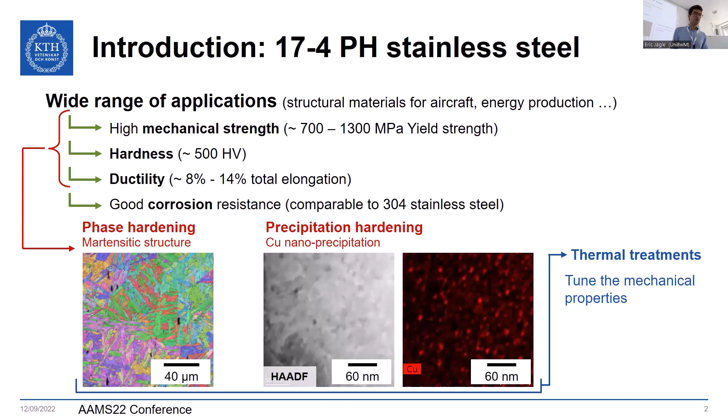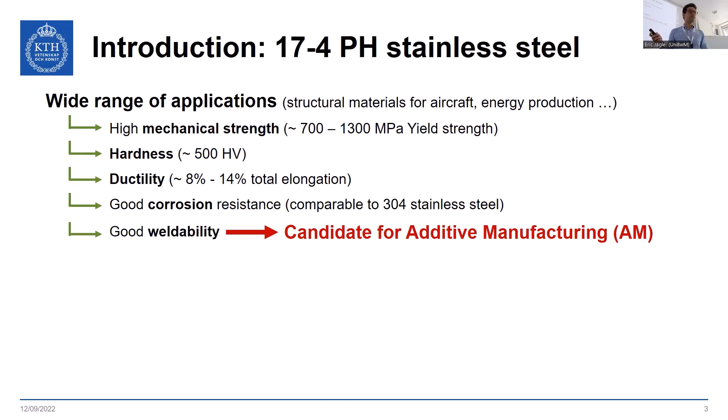These mechanical properties are mainly due to the microstructure, with phase hardening from the martensitic structure and precipitation hardening coming from copper nanoprecipitates. These are tunable mechanical properties, especially in conventional processes through precipitation hardening. Another interesting property of this material is good weldability, which makes it a good candidate for additive manufacturing.

If we take a look at the number of papers, here I plot the ratio between published papers and the overall papers in the engineering materials field. Overall the number of papers is increasing, and you see that for PH steel and additive manufacturing there's an increase of published papers. If we split this down into different techniques, there's a majority of work focusing on SLM, also work on EBM, and one coming after that here.

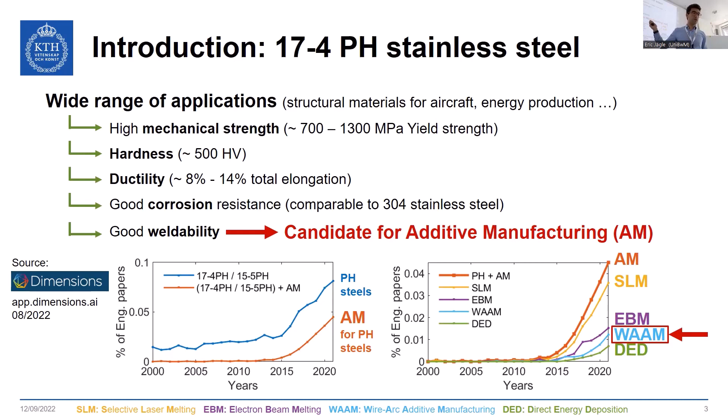We chose to focus this study on this topic. Why? Because this process has some interesting features.

It has allowed achieving relatively high deposition rates. Costs for materials and equipment are relatively low compared to other processes, and it also allows building medium to large scale parts. However, it's not really suitable for small or very high complexity parts, and the surface roughness is not always so good. Here you can see in this picture that just-built material has quite high surface roughness and would need machining for probably most industrial applications.

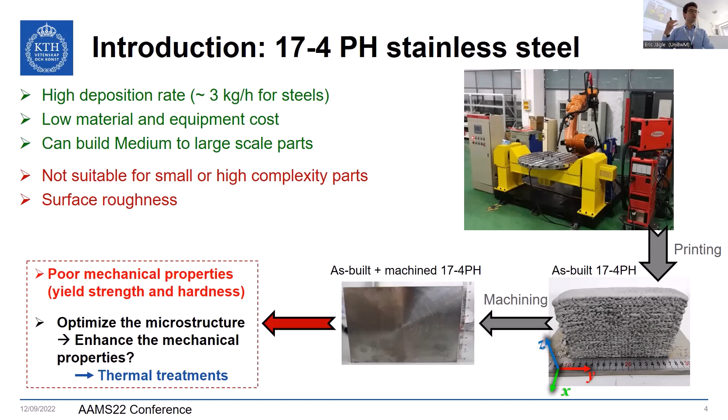However, as printed, the mechanical properties of this 17-4 PH are relatively poor in terms of yield strength and hardness. So the question we had is how to enhance those properties through thermal treatments, as we saw before, through the tuning of the microstructure.

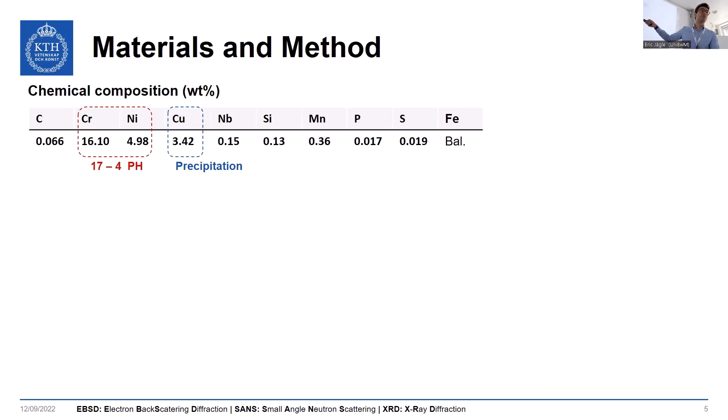So here I just put the materials. It's called 17-4 PH because it's 17 chromium, 4 nickel, more or less. Here you have high copper composition for precipitation of these nanophase copper precipitates.

Our methodology was to apply different thermal treatments, starting from the as-built, so aging at 480 for up to 4 hours, or a dual thermal treatment with first a solution treatment at high temperature with different temperatures and times, followed by quenching, and then subsequent aging at 480 for up to 4 hours.

All this will then be compared in terms of microstructure, characterized in terms of microstructure and mechanical properties through tensile tests. The microstructure is also compared to thermodynamic simulation that has been done, but I'm not going to present much of this in this presentation.

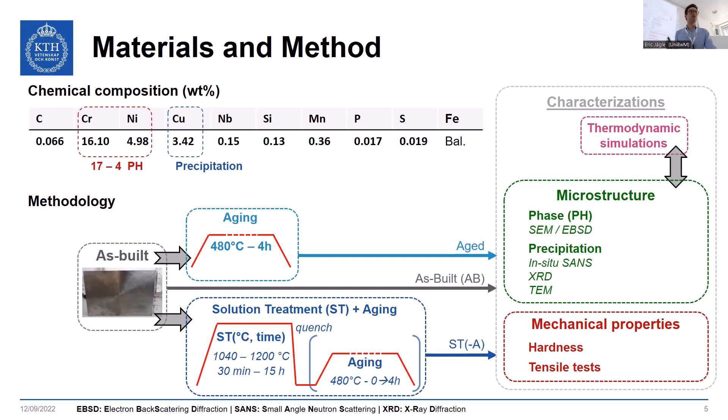So first of all, let's take a look at the as-built condition. You see as printed, you have a kind of columnar structure. The building direction is on the vertical direction. You have some cells inside.

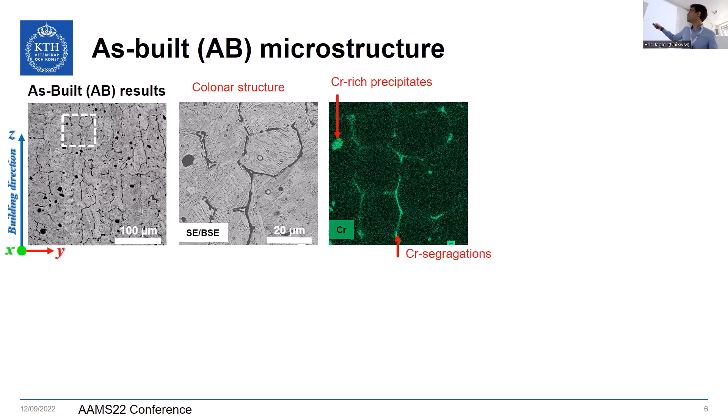You can see that at the boundaries of these cells, you have chromium segregation. You also have some precipitates. In terms of crystallographic microstructure, you have quite a high crystallographic texture.

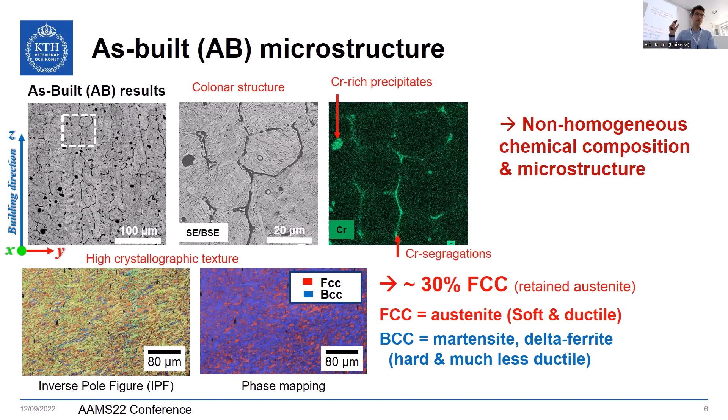What can be put forward is that we have quite a non-homogeneous chemical microstructure in terms of chemical composition and features, which probably leads to the poor mechanical properties that we'll see after.

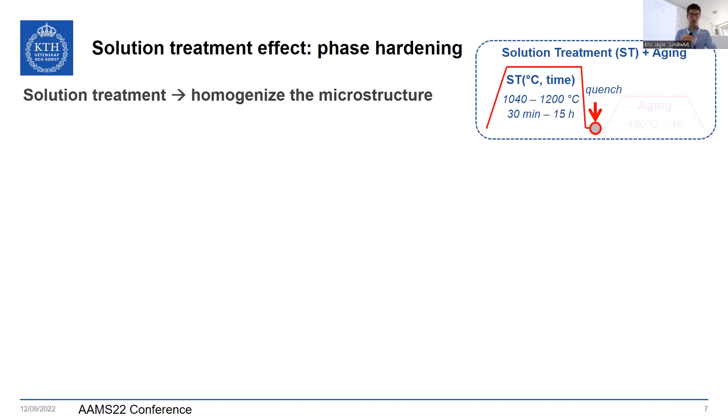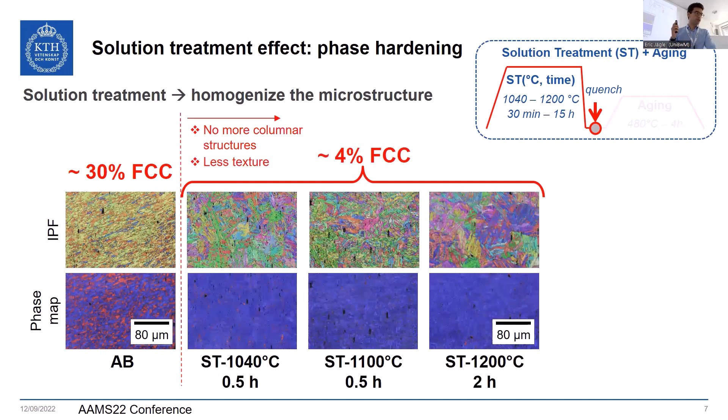So one strategy is to apply this solution treatment. Solution treatment will have the effect of homogenizing the microstructure. So we pass through austenization and then we quench. Here is the as-built microstructure for record, and then we have the microstructure after the solution treatment and quench.

So here you see that we reduce a lot the amount of FCC austenite phases. We also have much less texture, even though we keep some texture. Here is the phase mapping.

We apply different solution treatments at different temperatures up to 1200 degrees C for 2 hours. For all of these, we have more or less the same 4% FCC, while for 1200 degrees C at 15 hours, so a very long solution treatment, we have this FCC value a little bit reduced.

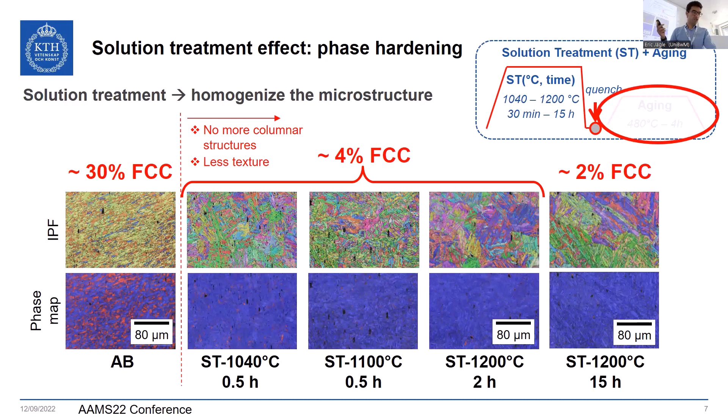So the question now is what happens during the subsequent aging. We will show here aging performed after 2 hours, and we'll see just after why I pick up this 2 hours aging.

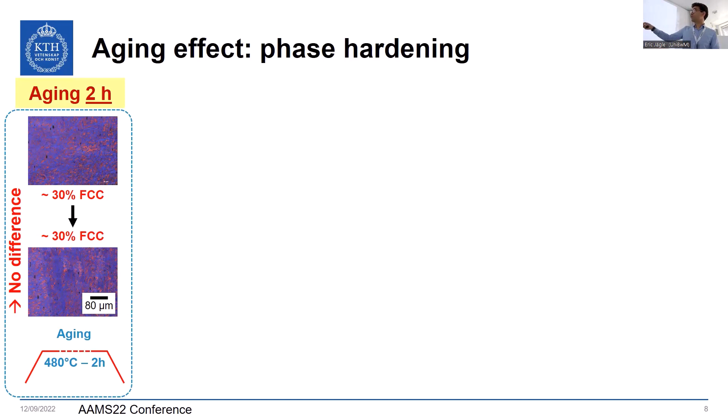From the as-built materials, there's mostly not much happening in terms of phase transformation. However, if we see the solution treated alloys, after aging at 1040 degrees C, half an hour, we have an increase of the FCC phase to 18% at the end of the term of the aging.

2 hour aging at 480, and it's decreasing with the solution treatment: 10% for those two, and for the last one we have 5% FCC after aging. So this austenite reversion, this metastable alpha BCC phase transforming to FCC, is reducing with the solution treatment, which means we have a more homogenized microstructure after higher solution treatment, which is expected, right?

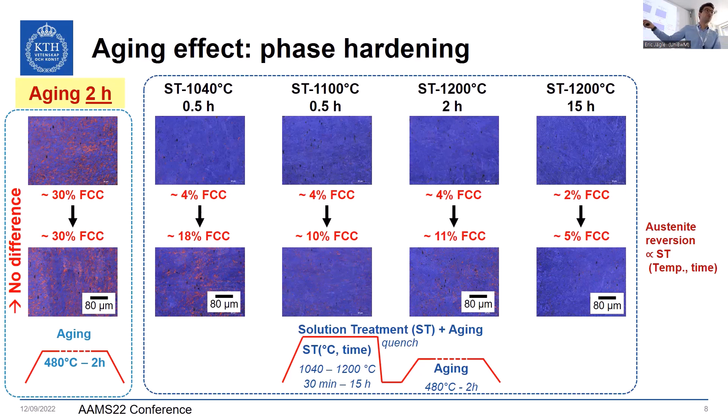But what is really interesting is that with this process, we can tune the amount of FCC. We have the soft phases, and then we can tune the ratio between soft and hard phases that we will have in our materials, and likely tune the mechanical properties, which is not possible in conventional process because we don't start from this very heterogeneous microstructure.

So in terms of hardness evolution, here I plot the hardness of all our solution treated alloys as well as the as-built stage over the aging time. So here is the as-quenched material, or as-built, and following aging.

We see that first we have quite a strong increase of the hardness at the first stage of the aging, which is very likely due to precipitation hardening, the precipitation of these nano precipitates of copper, because this BCC to FCC transformation would only have a softening effect.

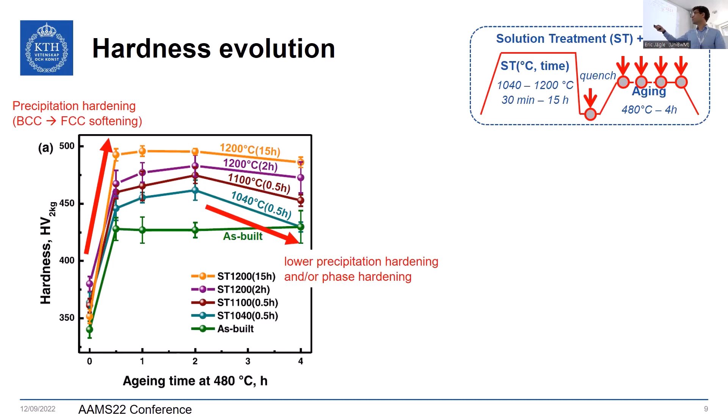At the very end, we have a lowering of the hardness, which could mean that the precipitation hardening is not optimal anymore, or also that the phase hardening is decreasing. We have more or less a peak hardening, so optimal precipitation and phase hardening, after 2 hours of aging. This is why I showed you the 2 hours aging before.

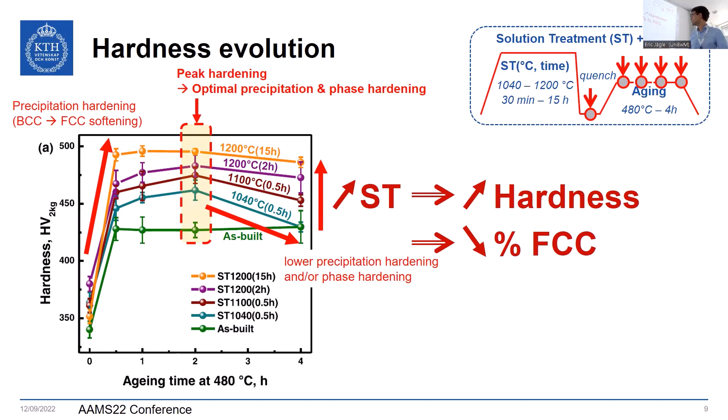Also, the global trend is that with the solution treatment, we have increased the overall hardness over the aging time, which is in line with the decrease of FCC phase. So we can tune the hardness depending on the FCC amount.

So now we're going to talk about the nano copper precipitation. To investigate this nano precipitate of copper, we used small angle neutron scattering, in situ small angle neutron scattering. We'll briefly introduce the technique, very briefly.

The idea of small angle neutron scattering is to have a neutron source - it was ILL, a nuclear reactor at the beamline D33 - pass through the sample and scatter with the precipitates. This gives us a 2D scattering pattern, and this was done in situ.

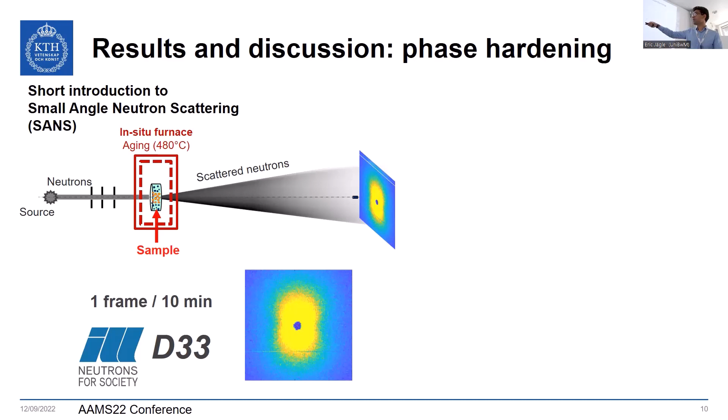We have a furnace at 480 degrees C, and we could measure every 10 minutes, one frame every 10 minutes. With this pattern, we do azimuthal integration, and then we get a 1D curve.

In intensity, the experimental intensity are the blue dots. The dots next to the left side are the intensity close to the center of the detector, while the dots on the right are the intensity on the edge. Here you see we have different contributions on this curve, different scattering - what's called Porod scattering, which in this case is caused by coarse precipitates or porosity or whatever in your materials. It's this green line here. We also have an incoherent background, which is a constant contribution.

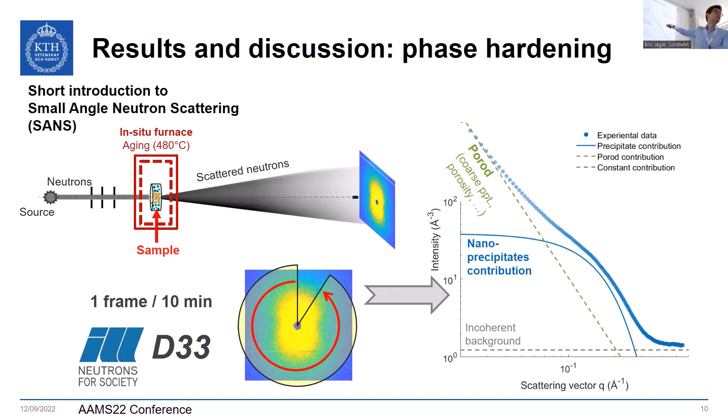And we have this nano precipitate contribution, which made this kind of bulge, which is the one that's the most interesting, right? So let's see how this contribution moves with the aging time. So here I put the two extreme materials, the as-built material and the solution treatment material at the highest temperature time, and you see the scattering pattern after 10 minutes, 2 hours, up to 3.5 hours.

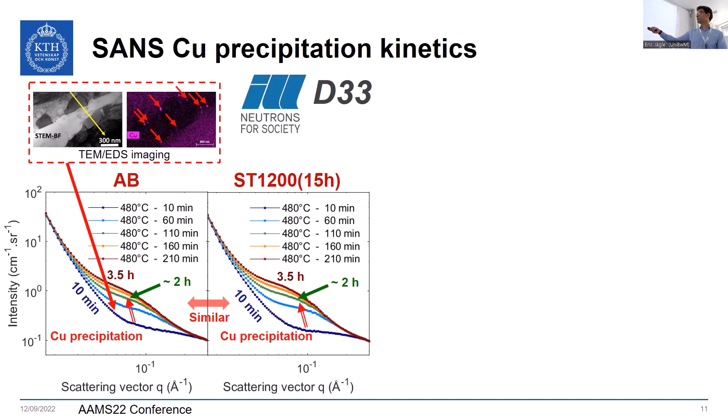And you see that finally both curves are relatively similar, which means the precipitation is relatively similar. The starting point has very few copper precipitates, which also explains why the hardness is so low. And we still have a few precipitates. We can model them here, even if it's not obvious by eye, and we can also see it by TEM.

And here, with time, you see the copper precipitation increasing, with this precipitate contribution increasing. From this curve, you can do model fitting and then extract the mean diameter of precipitates for the as-built and solution treatment. You see how it evolves, and you can also extract the integrated intensity, which is closely related to the volume fraction of your precipitates.

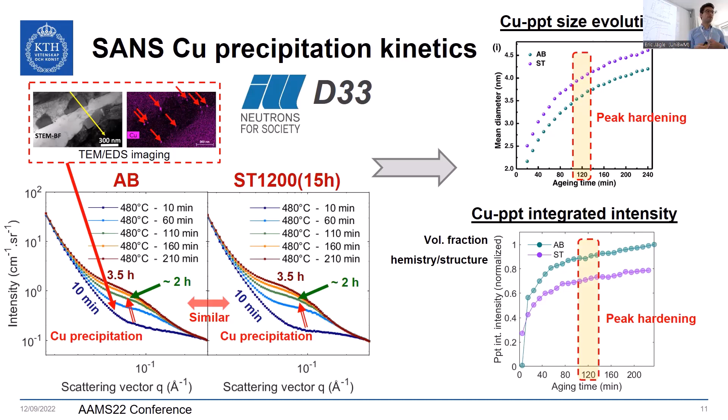And you see that it's increasing and reaches a kind of plateau. After 2 hours, we basically have nucleation and growth of most of the copper precipitates, which explains why we have this peak hardening at 2 hours. After that, we certainly have coarsening, mostly of the copper precipitates, which could explain that after this, the mechanical properties could decrease, because if they're becoming bigger and less dense, that's not the best.

So what about other precipitates? We also have a few other precipitates, of course. We have some chromium carbides. So here I display a lot of data from the Soleil synchrotron on the DIFFABS beamline.

So it's XRD data, wide-angle X-ray scattering for all the different alloys, different solution treatments, and different aging times. So a lot of data, but in short, what we see is that we have some chromium carbides in low volume fraction. We have some inclusions, MnS, MnSiO3, and we also have, more interestingly, some niobium carbonitride, which is present only in these two stages. So they are precipitates at high temperature, but at too high a temperature, 1200, they dissolve.

So then we cannot see them anymore. And after aging, they do not reprecipitate. It's not a high enough temperature.

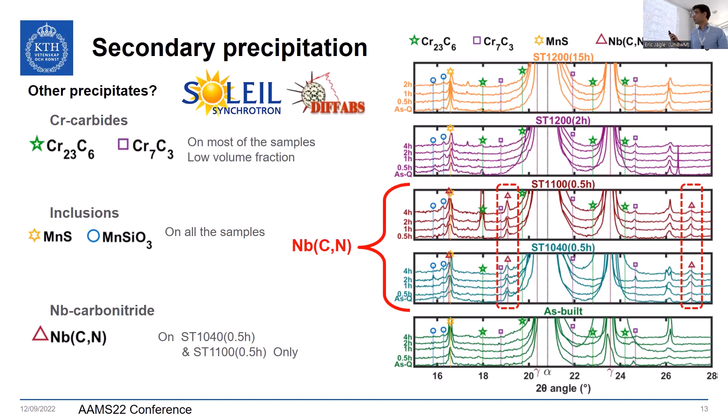But if we apply this aging, then we increase the yield strength, also the elongation to rupture, or the ductility. Interestingly, for these three alloys, we have very similar tensile test results, even though the FCC fraction varies from 30 to 10%, which is of course a bit surprising.

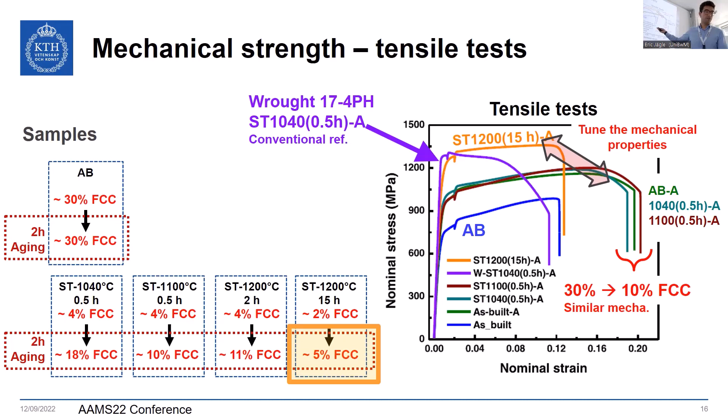And for this final, highest temperature alloy solution treatment, we have a very high yield strength, similar to the wrought material, and relatively high, maybe even a bit better ductility. What is interesting here is that we could tune the mechanical properties through this process, depending on whether you want high yield strength and lower ductility, or lower yield strength and higher ductility of your alloy, which is possible thanks to this additive manufacturing process.

So in conclusion, we see the influence of solution treatment plus aging on phase fraction, also on precipitation of copper precipitates, with a 2-hour aging being the peak hardening for this alloy at 480. There's potential to tune the properties and mechanical properties in terms of hardness, and also maybe later tensile behavior, through the phase hardening and FCC content.

One perspective of the work would be to understand why this variation from 30 to 10% FCC does not seem to change much the tensile properties of these three alloys, which could also be linked to secondary precipitates like this NbCN that we found only on those alloys and not on this one, for instance, or other factors that we haven't acknowledged yet.